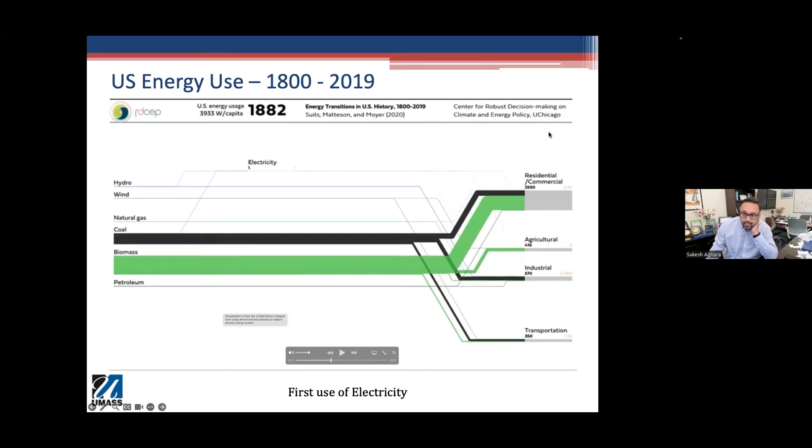This is a nice snapshot put together at the University of Chicago Climate and Energy Policy. It shows how electricity, as we used it, was basically non-existent from the 1880s into the 1900s. But as we learned the opportunity that exists with electricity, because you can generate it in one place and move it somewhere else, we found different ways of utilization.

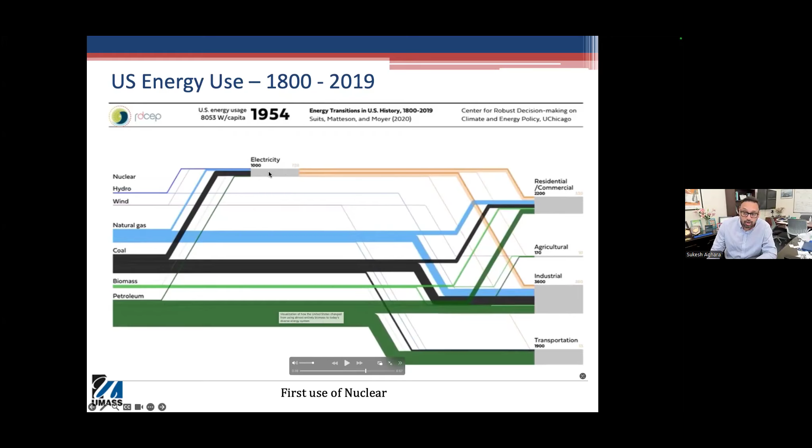The growth in how we use electricity is expansive. In 1954, you see the electricity component on the scale, showing how we consume energy and in what different categories. The EIA looks at four major categories: residential and commercial, agriculture, industry, and transportation. It's evident that in the beginning, a majority of all electricity was mainly used for commercial and residential buildings.

As we look at where we're going, the demand for electricity continues to grow, and we're learning how to make electricity using more diverse kinds of resources. We're learning that we can essentially reduce the overall carbon footprint, or at least consolidate it, and hence be more responsible in terms of how we put carbon out into the atmosphere.

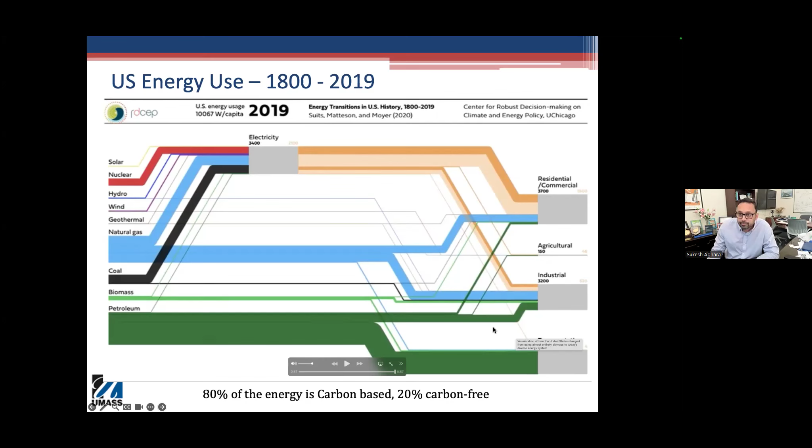In this graph from 2019, you can see that beyond residential use, electricity is now found creeping into agriculture applications and industry. Very soon, even in just the last five years, the expansion in the transportation sector is obviously very high and anticipated to be great.

If you shrink all of that into a similar graph, but now as total energy consumption, this is why we are all here. We're talking about this because in spite of all the technologies we just discussed, and centuries of experience working with other forms of natural resources including wind and water, we still find carbon-based sources very convenient for us. It is, in fact, very pervasive in our daily use. Basically 81% of all energy we use is still carbon-based. Only about 20% is non-carbon-based.

Of that, if you go into electricity demand, about 25% is nuclear, still 23% is coal, and then you have about 10% renewable. If you really break down the renewable, you'll see that there's still actually a biomass component that dominates. So I think we still haven't really separated ourselves from fossil or carbon-based sources, which is why there is an anticipated electrical sector growth into the next decades.

We're going to probably electrify more things, including heating sources, transportation, and others. So there's going to be growth in demand, and we need to make a choice as to how we do it responsibly and affordably while we clean up the source and hopefully go to net zero carbon.

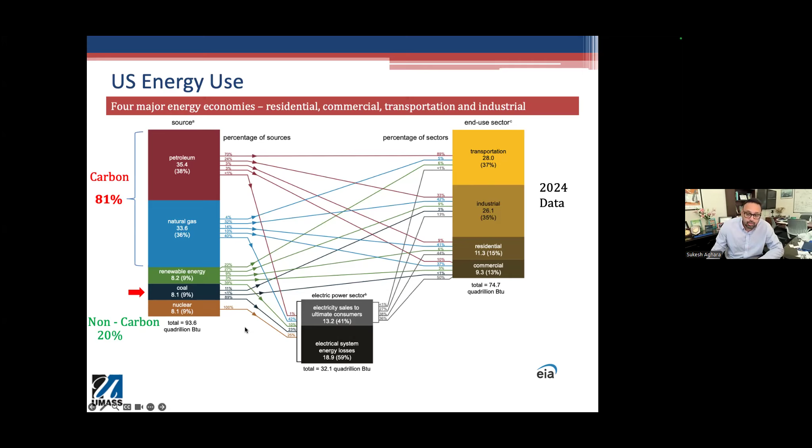If you look at the cost of energy, it's not only about affordability from the macroeconomics point of view, but it also has a significant environmental impact. It's very evident when you look at lots of studies that show developing countries, including ourselves, when in that rapid growth phase, tend to choose economy over responsibility as much as we can.

So we try to choose the cheaper, more easily available resource as we can. But it's not just about being cheap. It's also about national security. Normally, when you can use resources that are within your own boundaries, you tend to do better in terms of your overall national security plan as compared to looking for an import of resources.

This became particularly evident in Europe as some of the Russian sanctions were put in place, since the Russians were major suppliers of natural gas and petroleum to the central western parts of Europe. So again, national security becomes a critical issue, and then obviously sustainability as we look forward.

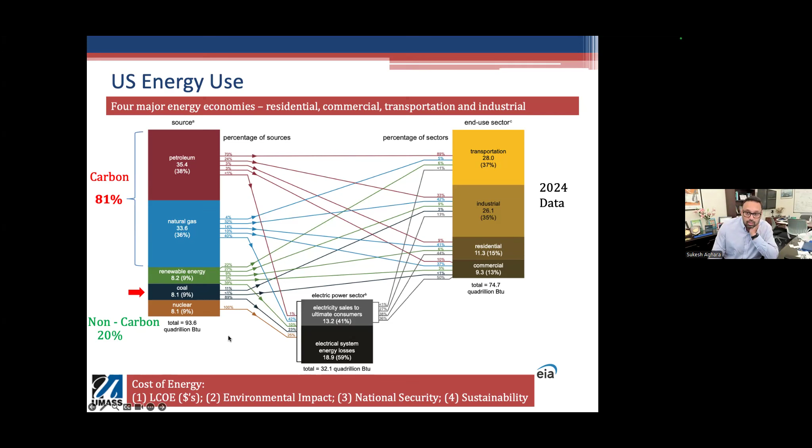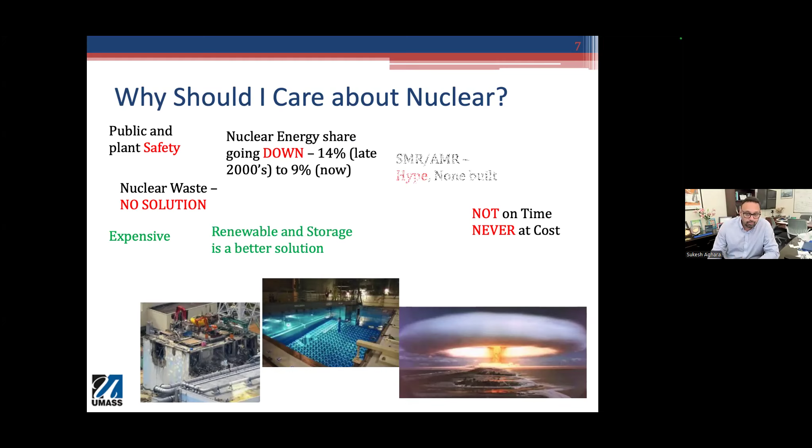So when we think about nuclear, rightfully, there are all these concerns, right? Public and plant safety, nuclear waste, we don't have a solution. Nuclear energy share is down—it used to be about 14%, now it's 9%. SMRs, small modular reactors, and advanced modular reactors, maybe they're hype. None of them have been built. Not on time, never at cost. The nuclear industry has had an issue with that. Maybe it is a thing of the past, a relic and not something of the future.

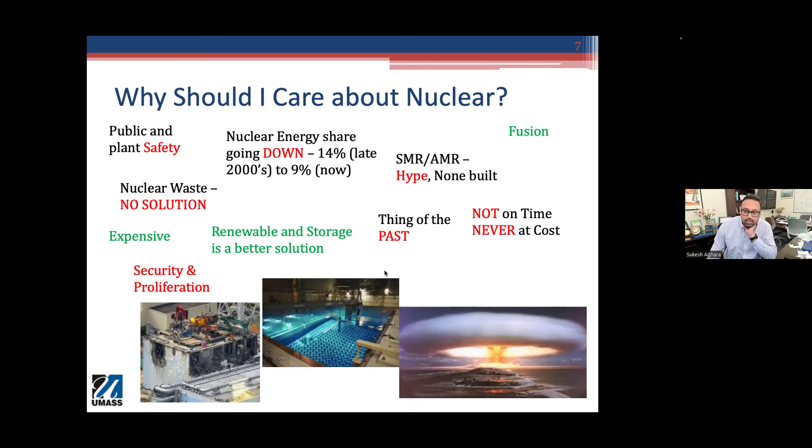So why not invest massively into fusion? Why not go into renewable and storage solutions? Because those are also clean, and maybe they don't have the baggage that some nuclear technology has. So if you really take a first look at it, you can walk away thinking, I'm not impressed. And honestly, that's okay with me. I think we should all not be impressed till somebody proves us otherwise, right?

So my hope is that I can share some of the things that are ongoing right now and the pressing issues as to why we need—and Governor Healey's approach as well—in terms of we need to look at all of the above and make some responsible decisions that will provide us a path forward.

So why should we talk about it? Well, we need to talk about it because there is demand growth. In fact, in this region, in ISO New England, because of all the very aggressive efficiency upgrades and other things we did, we were able to actually move the demand curves down. I'll show you that. But now we've kind of squeezed the apple as much as we can—there's no more cider to be had. We need to figure out where we're going to get the new bushel of apples.

We definitely have a very stated decarbonization goal, and I think none of us on this call would disagree with that. We can decarbonize, we should decarbonize as much as we can, but we have to do it in a phased approach. There's no on-and-off switch on this, and we need to figure out how we can do it responsibly.

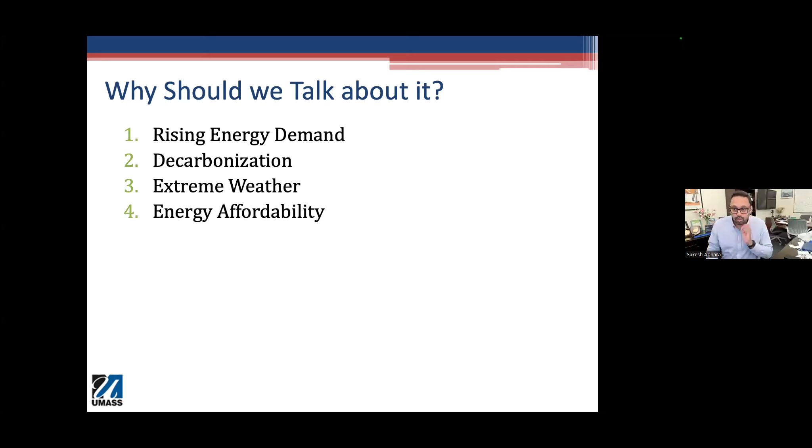And then energy affordability—energy is essential for all populations, and we can't just ignore it. So I wanted to highlight the importance of energy demand, and there are lots of factors that influence that. Decarbonization could really put a lot of pressure on our demand for electricity, or growth in electricity demand, especially if you look at the transportation sector. As you go into EV deployment, you're clearly going to have a demand for electrical capacity. This is the ISO New England's 2024 capacity report that just came out, showing where we're going to be in terms of projected growth going into the next decade.

I talked about extreme weather. Extreme weather really means you need a grid that is actually resilient—not only an ability to have a reliable energy source, but a resilient one, especially in the Northeast. I lived in Texas when a major hurricane came through. It was hot and uncomfortable, but once the hurricane was gone, I could just open my windows and be out there. If we had an extreme weather event in the peak winter months—and I'm going to show you one—it's a different situation. You can't really do it without maybe a fireplace and figuring out a way to make that work.

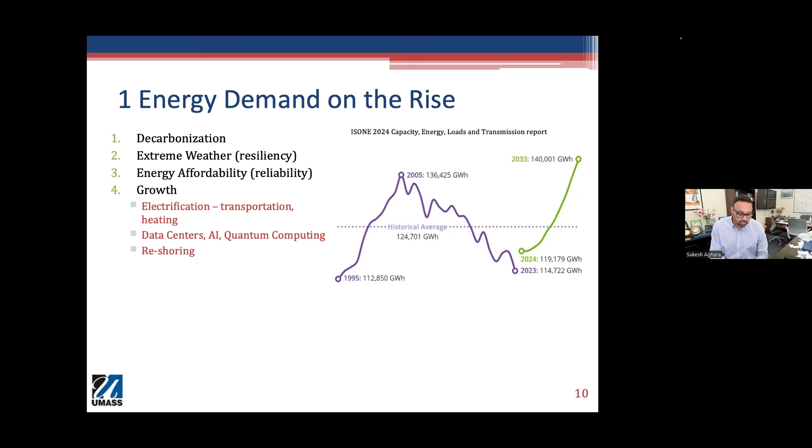So from that ISO New England report, they basically are showing something. This could be good news for renewable energy, right? Because it's an intermittent source and you're only using it up and down. The good news is we used to have a high electrical demand curve in the summer months with a low in the winter. If you look at the future, what they're looking at is an across-the-board almost flattening of that energy demand curve — about 27,000 megawatts of power across the board, summer through winter.

So this could mean good things. This could mean that you would have a demand for a greater baseload power. You could also absorb better variation in your renewable energy production, and then you can also complement that with some storage capacity. But overall, the curve's shifting up, which means that your baseload demand is going to go up, your EV demand curve is going up, your heating demand curve is going up, and you need to offset that demand with some kind of responsibility.

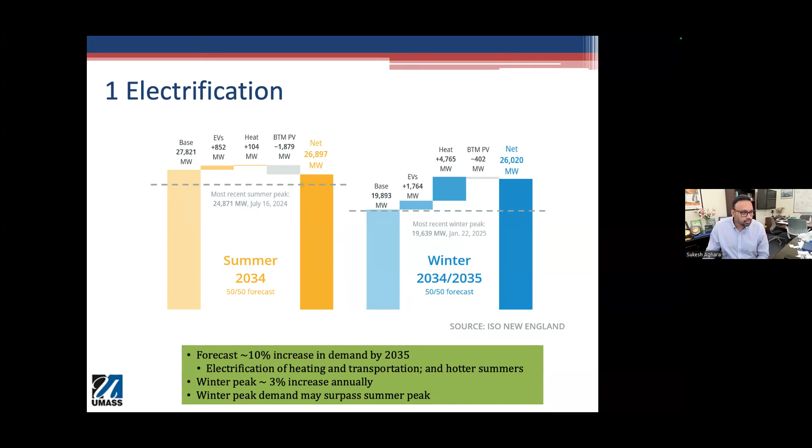I kind of mentioned this, and there's a whole presentation on this by itself. There's a lot of conversation and real money flowing into nuclear technology development, primarily because of the generative AI data centers. All of the big techs — the easy ones to follow — Amazon with about a $2 billion investment, Google a $1 billion investment, Microsoft invested $1.2 billion on a power purchase agreement on the Three Mile Island Unit 1, and Meta the same thing. Every major corporation and everybody underneath them are all making significant investments in all forms of energy technology generation, but particularly of note is them going into nuclear energy, because they've run all of the different economic models and reliability models, and they keep coming back saying the only way they can get there is potentially 3 to 4 times the nuclear capacity that currently exists.

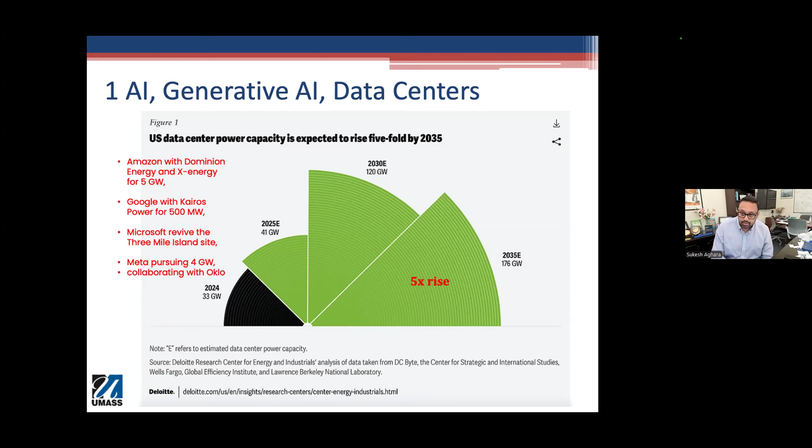So as you start to look at the decarbonization path, and if you really look at this risk analysis that one traditionally looks at and the impact, you really have to dive deep into this to look at where's my impact — how do I make something safe and clean. So the path to clean energy: you're looking at solar, wind, and nuclear, which is where you have the greatest potential for growth. Hydro, we've tapped into pretty much everything we can.

We can potentially have some new technology that can give us a little more of a nudge to increase capacity, but there's really not a whole lot of scale capacity there. So we can all agree this is where my best growth potential is. And if I was going to be emphasizing solar, wind, and nuclear, the conclusion is we need to quadruple all of them in order to replace all of the fossil fuel we currently use, if you want to decarbonize or get to net zero, and to offset the anticipated demand growth from technology development.

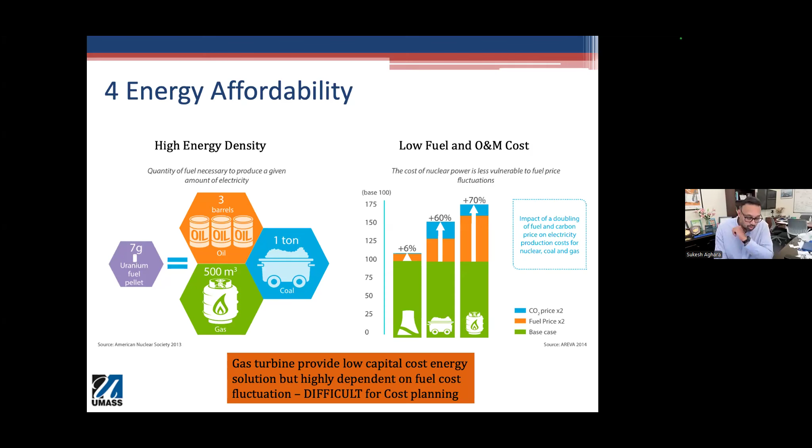I won't spend too much time on this, but if you really start to break this down, I have a PhD student working on this model, running the specific details. You can build computational models that take all these various real-time data and run simulations to understand the impact as you vary the capacity on the grid, and also as you vary factors like temperature, gas prices, and other variables to look at those influences.

So when we look at energy as an essential and affordable need, the economic picture is much more complex. We've been a beneficiary of investments that some people decided to make in the 50s and 60s. We made investments in those long-term infrastructure costs.

Distribution lines, transmission lines, even some of that nuclear capacity that was built in, have been giving us very affordable energy for a long time. As those infrastructures age, we need to replace them. That infrastructure is a long-term commitment that allows us to levelize our baseload power demand.

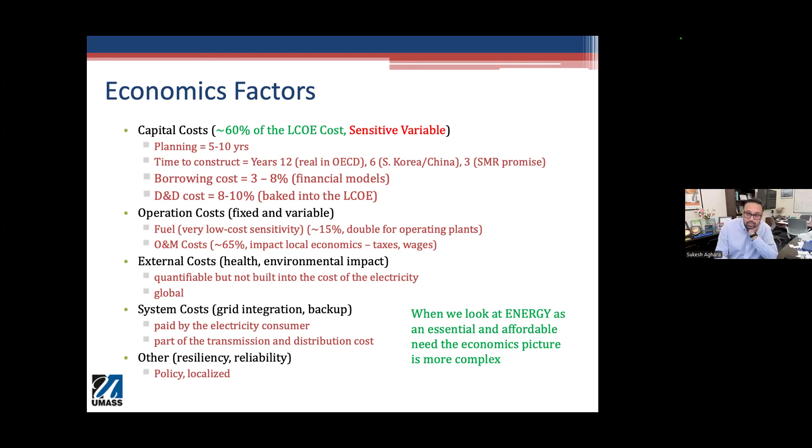Again, there's a lot of things. So now I'm going to pivot into how nuclear is looking. I painted the picture that we're going to have an energy demand, and we're going to have to make critical capital investments to improve our infrastructure, and think about diversifying our energy sources. So where is nuclear in all of this?

Nuclear energy has been dormant in this country. We hadn't built a new nuclear power plant in 28 years, and we benefited from all the build activity from the 60s, 70s, and 80s. We had more than 100 reactors deployed all over the country, providing about 20% of the power, and it continued to produce 20% even as energy demand went up over those 30 years. So how does that happen?

When we first built the reactors, we were learning how to use them efficiently. There's something called the capacity factor, meaning the capacity to produce 100% - well, what does it really produce? If you look back at the year, how many days was it actually operational? The capacity factor of nuclear reactors in the 60s and 70s was horrid, in the 50 to 60% range, meaning only half the year it was producing electricity. The other half it was closed, shut down for maintenance or refueling.

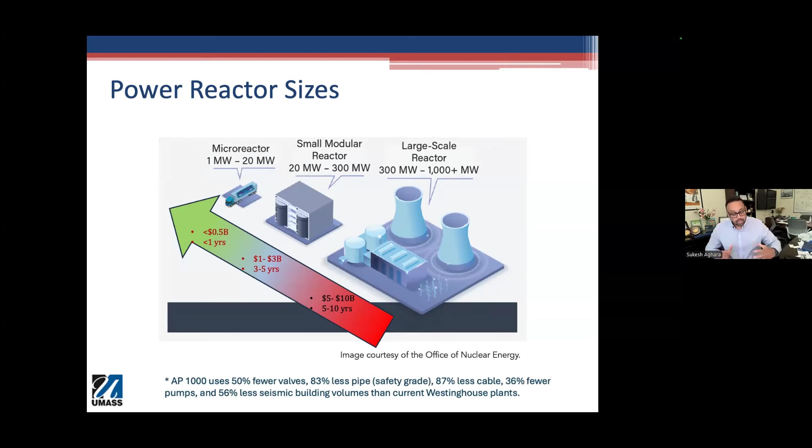So a nuclear power plant is kind of like that, right? You're going to spend all this money to build a plant, but you're not making any money till the first electrons get into the grid. So you can get to that first electron a little bit faster. It's about 10 years for a gigawatt reactor, about 3 to 5 years for an SMR, and then about a year or less for microreactors. So this is a very specific solution to the known problem we had with construction overruns and time to build these reactors.

So let's take a quick look as to what that looks like. EBR was the first reactor that we ever powered, at Idaho National Lab, basically gave us the first electrons to power up the bulb. The Generation 2 reactors, like the Pilgrim Power Station in Plymouth, which we decommissioned. Generation 3 is Seabrook Power Station, which is not so far from here, from Lowell.

In the Generation 3 Plus reactors, we essentially have different ways to push water in the event of an accident. In this case, it's essentially sitting in a water pool. So when an accident happens, unlike Fukushima for instance, you have an additional barrier. And it's below ground, which means you have yet another barrier. So there are actually 5 to 6 total barriers between you and the environment in the worst case scenario accident.

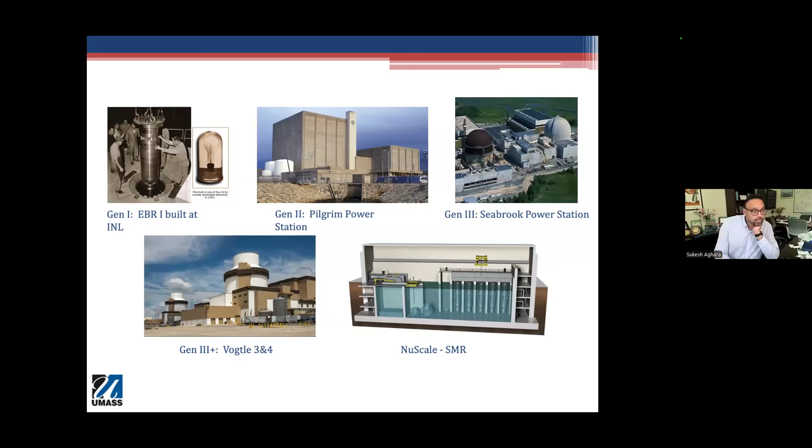So I know I introduced you to a lot of things. I can pause here for a few minutes, and then we can conclude with a few specific examples of where some of the advanced reactors are going.

So just to give you an idea, where are we right now? We have the experience of building 75 different reactors 4 decades ago. We now have more recent experience building the 2 reactors, Vogtle 3 and 4, which were built with 7 years of delay and a $17 billion cost overrun.

I'm never going to hire that contractor again. Okay, well, I wouldn't, right? But then you can say, okay, what did you do between 3 and 4? Well, we reduced the cost by 40%. Well, it's 40% less, but it's still twice as much as it used to be. I mean, what you told me it was going to be, and 7 years too long.

So what are some of the factors? The industry and independent agencies have evaluated where some of the potential issues were. Some were on the regulatory side, some on the enforcement side, some with the inexperience of building these kinds of massive projects in the country, and some associated with supply chain. So we collated all of that and systematically evaluated how you can reduce the risks of such overruns.

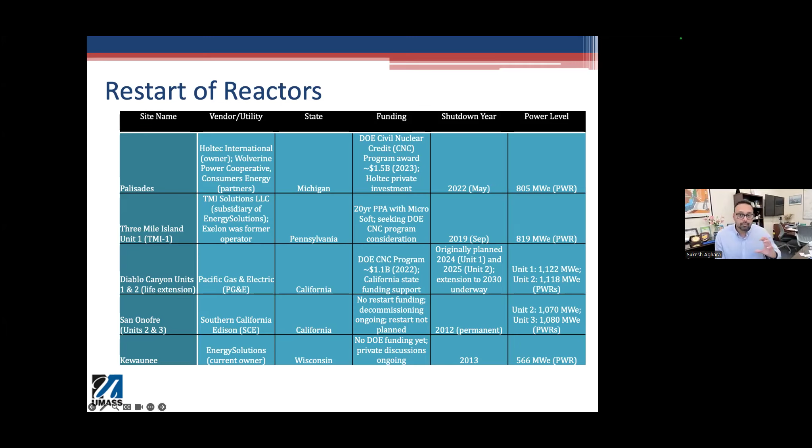So every reactor that's been built currently, there are two specific things you need to keep in mind. One, we have what is called an open fuel cycle, so we basically only do a once-use, once-through. We don't close the fuel cycle. In the old days, it's like every aluminum can you use, you threw it out, everything went to the landfill, right? So that's one issue.

We normally don't look at aluminum anymore as a waste, we actually look at it as a resource. And nuclear spent fuel is actually a resource because there's a sufficient amount. In fact, there's only about 5% of usable fuel that actually gets used. The other 95% is a combination of different things that we would actually want to reuse. There's about 3% of stuff we need to worry about, but a lot of that is short-lived, and that's your radiotoxicity. It drops significantly in the first 7 years.

So a lot of the spent fuel that we have in this country now is actually an invaluable resource. Now, we did not build the reactors with the intention of taking that spent fuel and doing something with it. So there's going to be some decisions we're going to have to make about what we're going to do. There are a few companies that are literally designing reactors to specifically take that spent fuel and make that their fuel. So essentially, they're going to use that spent fuel and start producing energy from it.

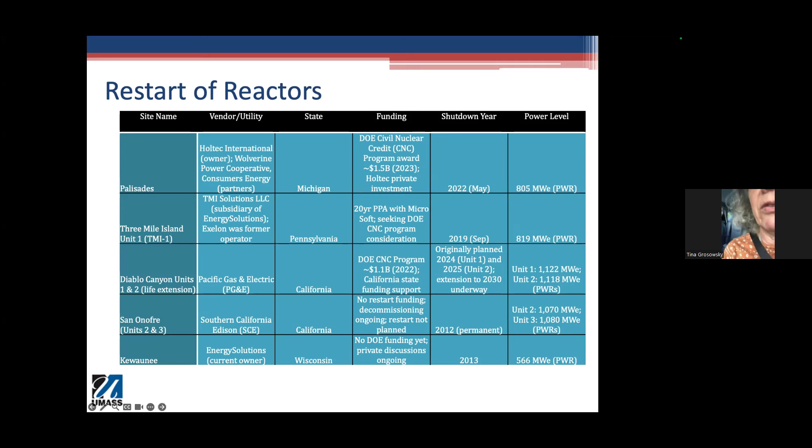Thank you for that question and comment. I'm humbled that you think I'm a good salesman, but I hope I am a better scientist and engineer. I don't have a reactor to sell, but I believe everything I said, that we are coming up on a demand for energy, and this technology may be a part solution. I don't think nuclear, even fusion, should power everything at 100%, but I think we should keep it in the mix, potentially around 30% of total energy demand.

As a state institution with an existing research reactor we've operated safely for 50 years, we have an operating staff and understanding of how licensing works. We're asking, could we be someone who helps further the technology, and how are we going to get that clean, carbon-neutral energy solution?

I'm part of the RIST Institute for Sustainability and Clean Energy, where I bring my nuclear engineering expertise. To be frank, we have some genuine doubters of nuclear, including a colleague who was a young child in Chernobyl growing up. I welcome their very intrusive questions, and sometimes I say, let me go back and read up on this and talk about it. There's still a lot that needs to be unpacked.

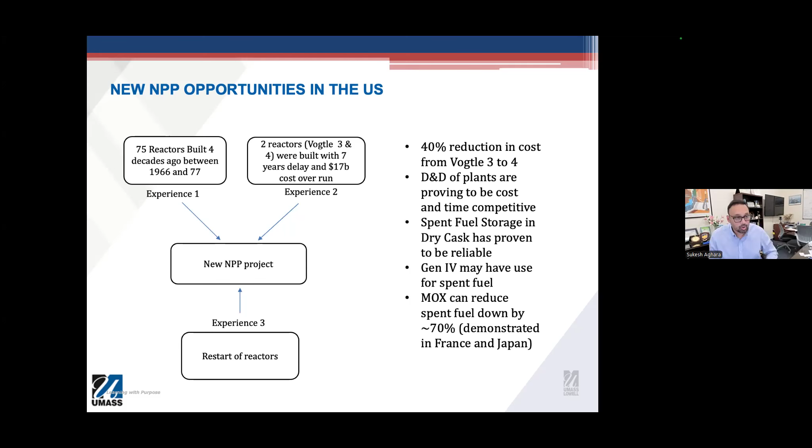Like my snowblower—you've got to clean the pipes, clean the fuel, make sure everything's working before you use it the next day when there's snow on the ground. Restarting is a very significant engineering demonstration of being able to take a reactor that was in some state of shutdown and bring it back.

There are a few of these projects currently ongoing with actual investments and specific timelines, and I think these are very clear indicators of where the industry is going. This will give more confidence within a 12-month period as to how our workforce is ready, how our NRC regulations are in place, and where we're trending—a clear indicator of where we're going.

Palisades, which is actually an Entergy Holtec plant, is currently the recipient of the Civil Nuclear Credit, a DOE investment into the program. Holtec is putting its own money into this plant that Entergy had decided to shut down. It was the same kind of plant we had here at Pilgrim, and it was shut down in 2022, fortunately right at a timeline where they could go back and look at it again.

It's a bit higher output, about 805 megawatts electric. They're looking to get this restarted by the end of this year or early next year. I think this will be a very clear indicator of whether you've learned how to throw the line in the water and actually reel fishing.

So this was a more near-term observation. Three Mile Island Unit 1 is another one—this was shut down in 2019.

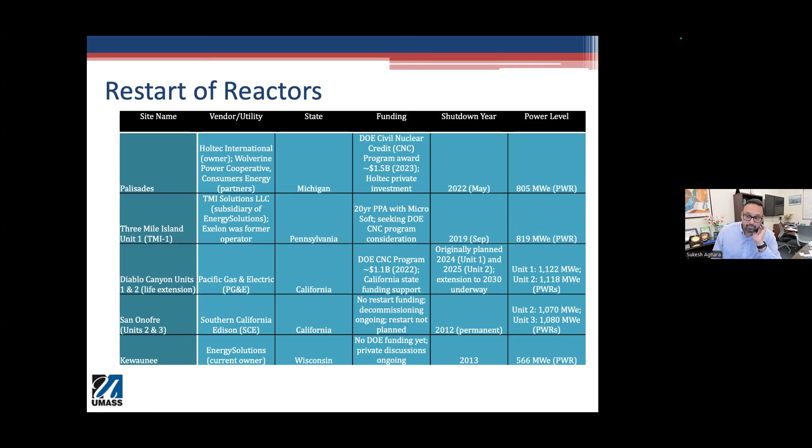Microsoft made an agreement and put in $1.2 billion to restart this facility. They want that up and running by next year, and they feel confident they'll hit that target. This was done by Constellation, so there are also multiple players involved, which gives you confidence.

There's a bunch of different people staging up competency, building up the workforce, and bringing the ability to do these things. Diablo Canyon, California is one of the second most challenging environments for nuclear power plants, and they have the luxury of renewables at scale deployment. We have about 10%, maybe 14% at best elsewhere, but at times in California they can get up to 50% renewable.

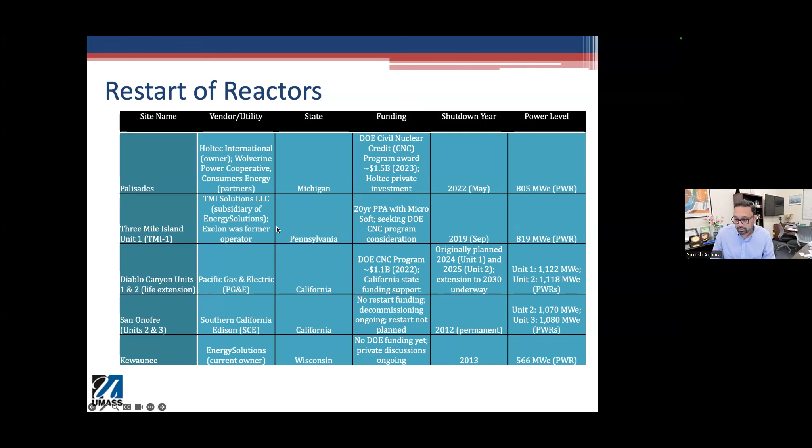Now I want to share some of the questions and hopefully some answers. Here are some of the technologies that are in various stages of the licensing process.

NuScale essentially completed their license. One thing they realized from their January 2023 license, in the failed project, was that it was licensed for a 50 megawatt electric plant. They made adjustments and now squeeze in under 27 megawatts of electrical power through direct conversion amendments. So now each of their units is 77 megawatt electric, which makes a big difference — a significant percentage more output from the same construction footprint.

There was a big announcement by TVA and an independent capital investment firm called ENTRA1, for $6 billion of investment in deployment of these NuScale units. This just happened a couple weeks ago — you can look it up.

Yes, UAMPS was a project that failed, but failure does not mean it's bad — failure means something was not right about it, maybe the financial agreements weren't right. I would rather have a project fail early, because then whoever made the mistakes can change what needed to change. I'd rather not have a plant that's 95% built and never fueled, because that's a waste of everybody's time and money. So honestly, I think UAMPS is a good way for NuScale to improve their business model and provide a better solution.

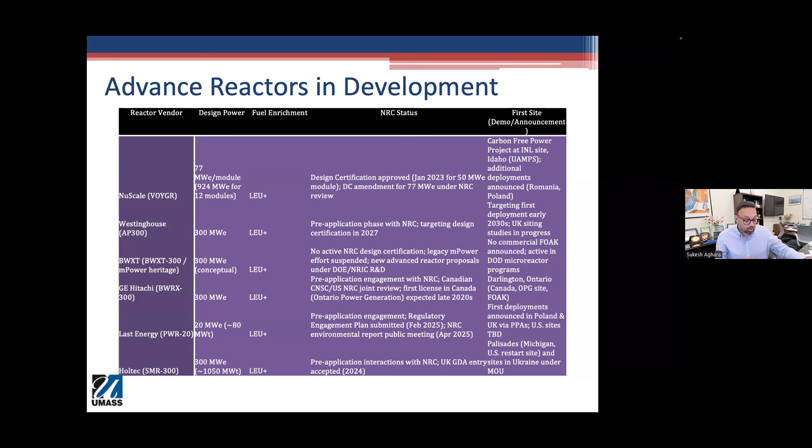Then there are these really exciting advanced reactors. Nanonuclear is one of them. I could give a lecture on each one of these technologies in gory detail, but what you'd notice is the second column. These reactors all essentially still use light water as a coolant, but they all use a different fuel called LEU+, which means they go up to 10%. That actually has better spent fuel attribution and a longer fuel burnup, so you can operate for a longer time.

But none of these actually use light water, so these would essentially have a very different profile of spent fuel. In fact, some of them below the top three would actually use spent fuel to burn in the reactor to produce electrical power. You're able to do that because you're changing the coolant, removing the moderator, and operating in the fast spectrum. It significantly shrinks the size down, and you're able to do things you can't do with light water. A lot of them use a very new fuel type.

The Triso fuel is, by far, like a little tennis ball. It actually has the containment inside the tennis ball itself, so you really don't have the issues of the clad material meltdown and the barrier. Each of these Triso fuel particles holds the fission products in itself. Triso fuel is nothing new — it has been researched, with lots of experimental demonstration and factory production, for about 20 to 30 years.

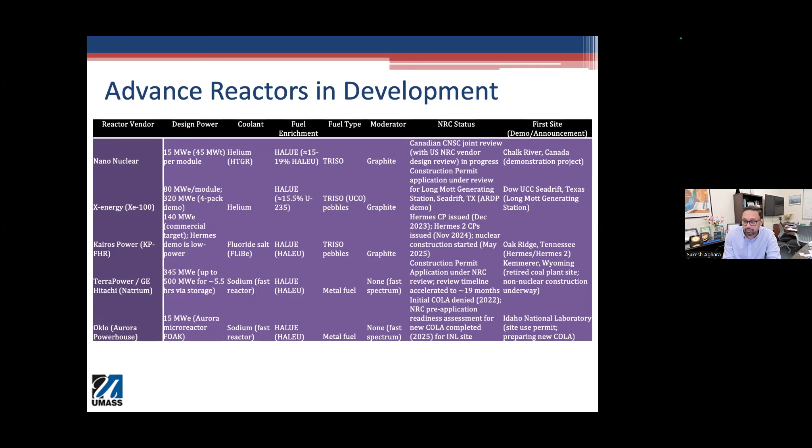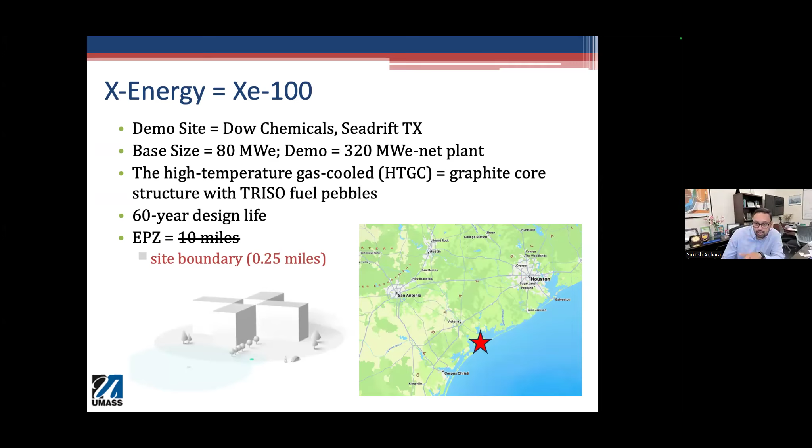I just have these slides that give a bit of a broader view for people who may be interested when I share these slides, but they're essentially condensed into that one deck. So my last plug is, if you're interested in looking at an actual operating reactor, I welcome you to visit UMass Lowell.

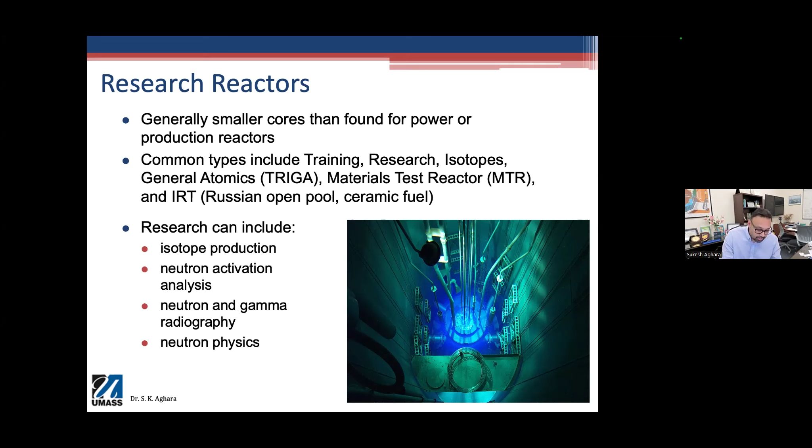We have an operating reactor. We have students who run them. They're all licensed NRC operators. And it is something, if you've never seen, seeing is believing. I strongly encourage you to come to our state university, and we would be very happy to show you the reactor. It is an engineering marvel that was designed before I was born, and it started operating just when I was born. So we have some really talented people, and we continue to have talented people. They're looking for new challenges, and I think we give them an opportunity. So with that, I will stop and take some more questions, and then we can wrap it up in comments.